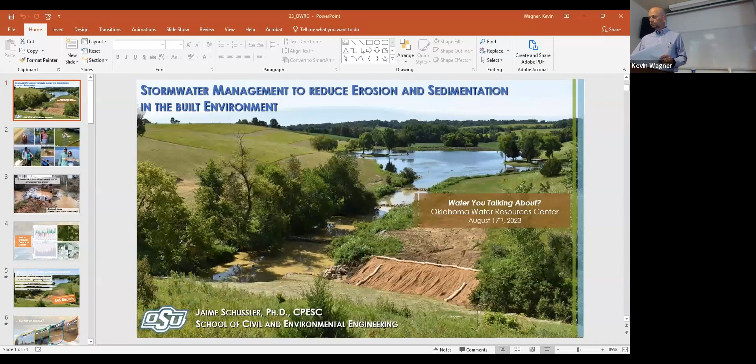Thank you so much, Kevin. Sorry. Gonna work. Just make sure. Perfect. Yeah. Thank you so much. All right. And I want to thank you all for being here and allowing me to be the guinea pig. I think going first is both a blessing and a curse. There's no expectations to follow up on, but I also hope that I'm getting you the information that you're anticipating today.

So I believe the title of my talk was Stormwater Management to Prevent Erosion in the Built Environment. I just had one correction that I added as I was going through these slides: it's to prevent erosion and sedimentation in the built environment. And so I just want to thank you all again for taking your lunch to listen to me talk about the things that I'm very passionate about.

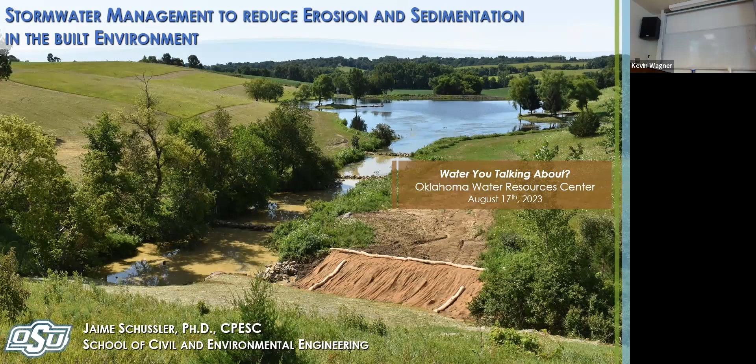Okay, so why do I care about our water resources? This is very important to me to relate to you, but this is more than just my work. This is my life. I'm very thankful my fiance actually came to support today, but you'll see him in some of these pictures, and we spend a lot of time around the water. We're big fisher people. We love to hike around the water. We just think everything is much better either on, in, or around the water.

And something else I really care about is keeping our waters healthy, because we have our golden retriever Max. He's a Pete's Pet Posse dog. You might see him around. But when he's not working, we can't keep him out of the water, whether it be the ponds on our property or creeks. So we want to make sure any water that he's getting in is healthy and not going to make him sick. And more so, I have some little nieces now, 3 and 3 months. They're also quite the water bugs. So when I'm thinking about the health of waterways in perpetuity, this matters even more to me now that I'm seeing the next generation.

I'm originally from Milton, West Virginia, or the lower Guyandotte watershed. One of the things that I task my students with when they start in my water classes is knowing what watershed you're from and what issues you're facing there, because in every watershed, there's very likely something that we could do better or improve. And so because I'm so passionate about these things, when I was thinking about a career, I decided to go into water resources engineering.

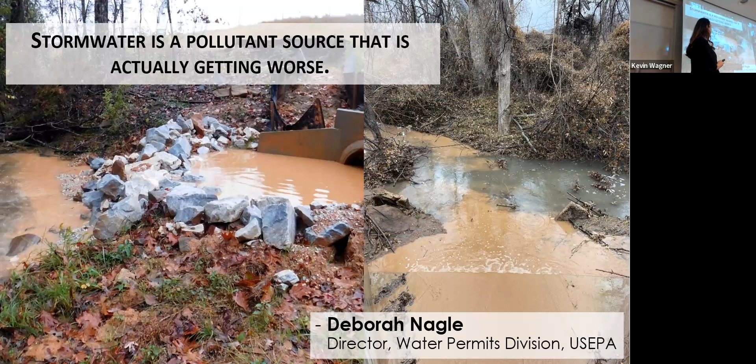Why is it getting worse? There's a lot of reasons. I'm sure you could give me a whole list, but the two that I focus in is the shifts in hydrology. Infrastructure, or ways that we were designing previously, are just not up to par with what we need them to be now that we're seeing shifts in such extreme events. We're having much more frequent and much more intense rain events. And how we've been designing just isn't going to cut it anymore.

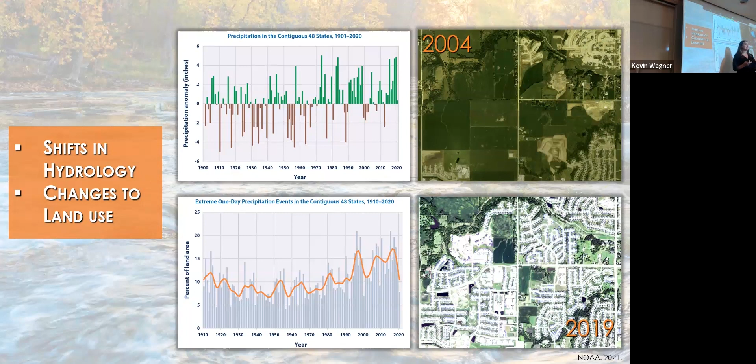The other big change that we're seeing is shift in land use. This was a watershed that I worked in Iowa during my master's. In 2004, you see a lot of open green space. Flash forward to 2019, just 15 years later, the exact same frame, you see so much more development popping up. So yes, post-development, we have all of these impervious areas that's going to increase our runoff. But how did we get there? And so that's what I'm going to focus on today, is some of this erosion and sediment control that we can do to prevent some of the downstream effects of the sediment-laden discharge.

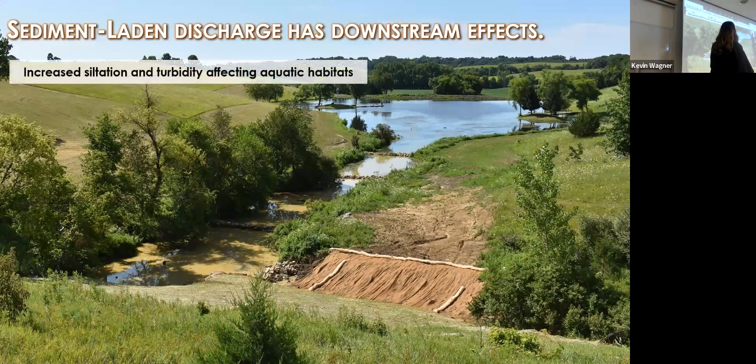What are some of those effects? Well, increased siltation and turbidity, that's going to affect our aquatic habitats all the way up. If all of our conveyance infrastructure fills up with sediment, we've reduced their flow capacity. So we can't be safely passing the same flows that it was designed for. And as I mentioned, increased rainfall, more impervious surfaces, higher runoff rates, higher flows. So we're already probably under-designed for the modern events that we're facing now. And so if we fill these up, we're in even worse condition.

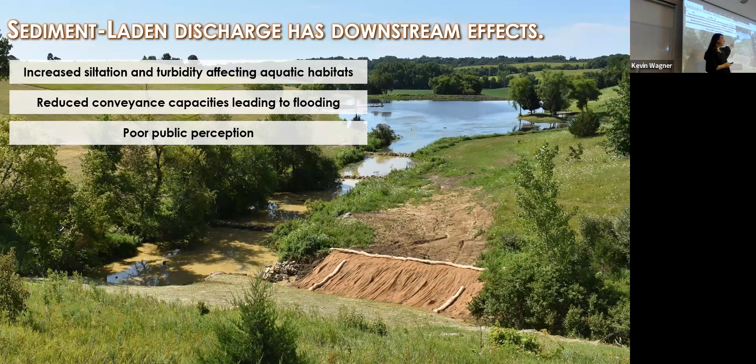Of course, poor public perception. This is my favorite photo to show of this. This is a private landowner pond right off of a construction site. We have a recreational pond, whether that's used for irrigation, for giving a drinking water source to livestock, recreation. We see a little dock out there. Well, a DOT comes in, they're constructing 2 new lanes of highway, 12 miles long. You can expect that there's a lot of exposed earth, and we see quite a bit of sediment-laden runoff coming into this pond. This pond had already been dredged out 3 times, and you see how many practices are put in place.

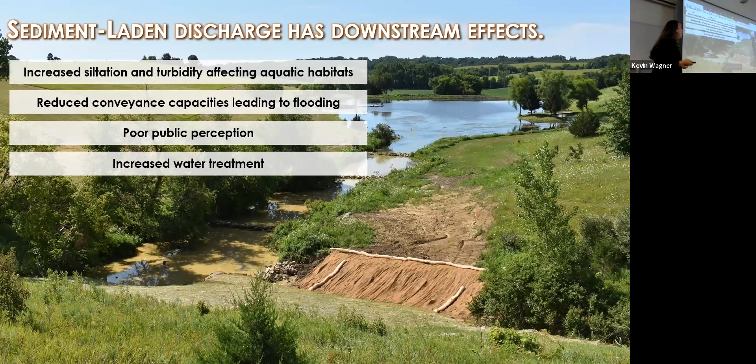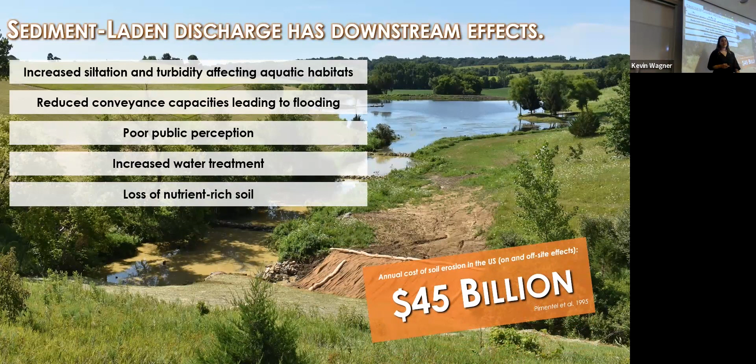Water treatment costs. If we're degrading our surface water quality, then we can expect we're going to pay for that on the back end. And then when we're talking erosion, I think a lot of people in here have an appreciation for nutrient-rich soil and good soils. And if we're just eroding that and washing that off, we can't keep up. The annual cost of soil erosion in the United States during construction, on and off-site costs, is $45 billion. So we're spending quite a bit of money on the effects of erosion and sedimentation.

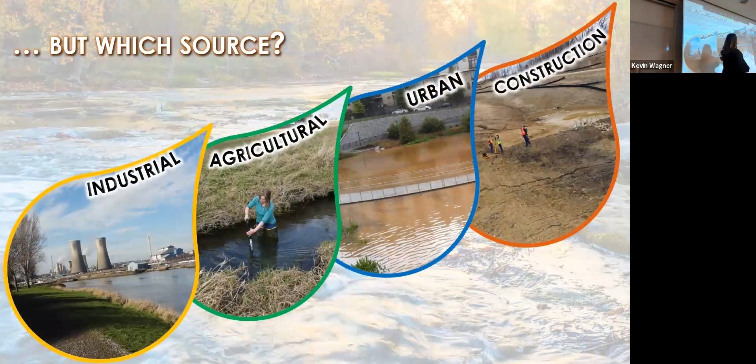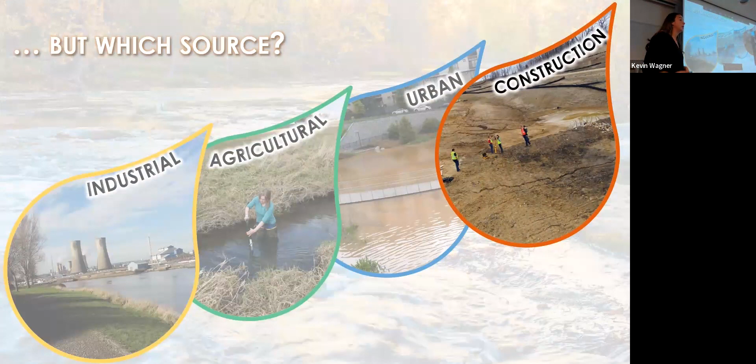Now, we talked a little bit about stormwater. Stormwater affects a lot of areas. We have industrial runoff, agricultural runoff, urban runoff, and construction runoff. The two that I focus primarily in are going to be these urban and construction areas. And today we're going to be talking primarily about construction, or that development period. So that period that we're getting to the built environment, or really altering those land use changes.

A lot of people will say, well, if this is such a problem, if it's so bad, what are we doing about it? There is some regulation in place under the Clean Water Act. We have the National Pollutant Discharge Elimination System. And then in construction, we have the Construction General Permit. Here in Oklahoma, we know this as the OKR 10.

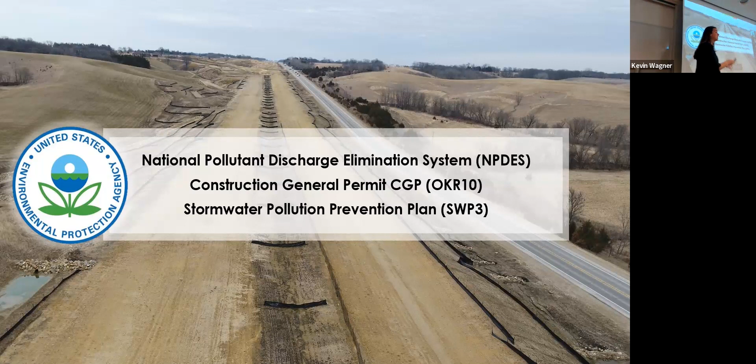This permit requires any construction that disturbs more than 1 acre to have a stormwater pollution prevention plan, or what we call a SWPPP. So this SWPPP includes erosion and sediment control practices, their design, the implementation, and the maintenance plan. This is a living document that is expected to be updated throughout construction. That way, if topography is changing, if land use is changing, we should be changing our practices or modifying our practices to make sure that we're treating those site conditions.

So I'm going to talk a little bit about the projects I've done and where my research group here at Oklahoma State is going. So we'll be doing a little bit of back and forth. Please stop me if you have questions. I'll also try to keep up with questions on the Zoom. If I don't get to them during talking, we will get to them at the end.

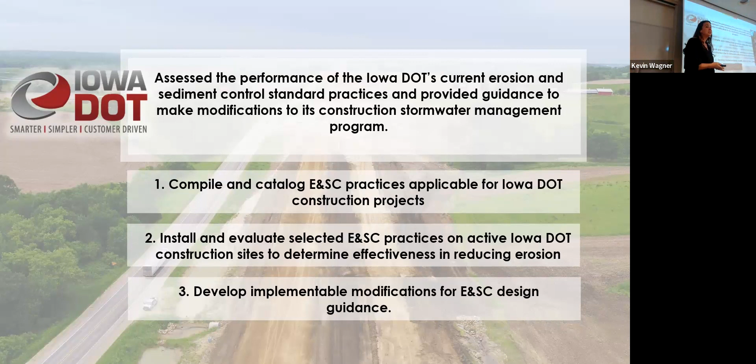Okay. So one of the projects I first started on in this area and learned the importance was when I worked with the Iowa DOT to do some field assessments of their current stormwater pollution prevention plan assessment. So we were looking at erosion and sediment control practices they were using, how effective they were, and what we could do to improve them.

So one of the first practices we looked at, I'm going to try to minimize this. One of the first practices we looked at were something called ditch checks or check dams. These are put within a channel or a conveyance to, one, try to slow flow velocities to reduce erosion within that channel and safely convey that stormwater. But they also have this effect where they create small impoundments within the channel. These impoundments are favorable for sedimentation, or that sediment to drop out.

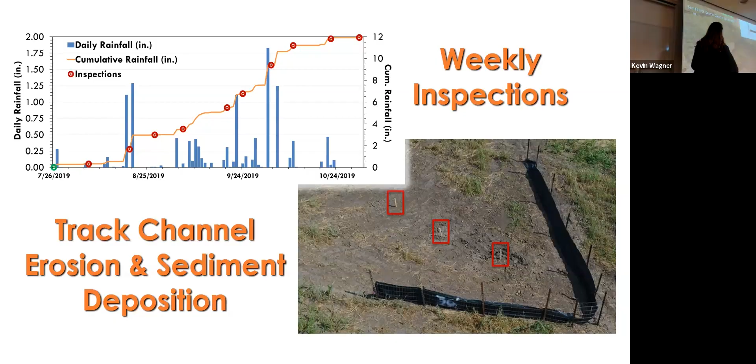So we had several different practices in the field. You can see some control points here that we had to survey erosion and sediment deposition. And we looked at those weekly and also rainfall on site. I heard several of you talking about runoff events, and I knew exactly how many runoff events there were on my master's project too. So the first one we looked at, which a lot of construction operators are using or know well, is this silt fence. So silt fence is a common ditch check, but also perimeter control that they put around the site to try to keep sediment on site.

Well, the standard installation just included these steel T-posts and this geotextile fabric that was attached with zip ties. When you put this in a conveyance channel, you have high flows and concentrated water. And you can see right here, it comes right to the middle or the lowest point in the channel. Well, over time, this hydrostatic pressure causes some deflection of this T-post. That soon leads to that geotextile being dislodged from the ground and the sediment washing out.

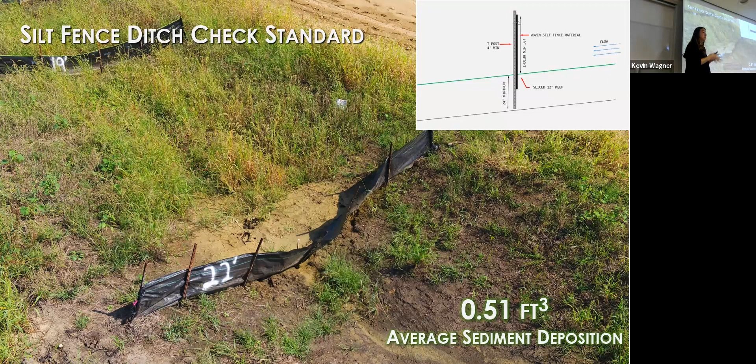So we monitored this practice over a construction season, and we had 3 in the field for triplicates. The average sediment deposition was about half of a cubic foot. So we looked into the literature and what other places were doing. That's the one big thing with erosion and sediment control. It's really not scientifically tested or based in their design. It's very much rule of thumb. And everybody does it a little bit differently.

So we looked, what could we do to improve this, to try to prevent some of these failure mechanisms from happening? And so we found this V-shaped ditch check, which was interesting because you have this vertex here. All the water is very concentrated right to this point, and we cut the fabric just a little bit lower. And there was a wire reinforcement on the back. Well, by cutting that fabric just a little bit lower, we created a weir. So we were controlling where the water was going, where it was dewatering from. And you can look just visually from the last picture to this one, the patterns of sediment deposition going much further back in the channel.

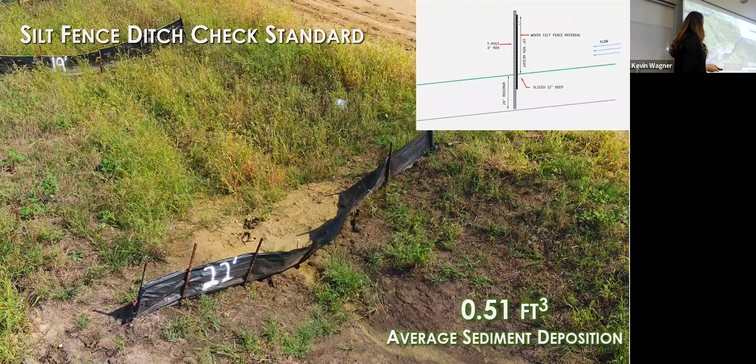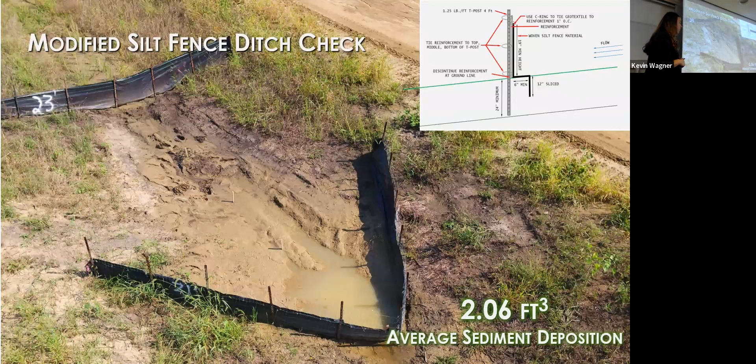Okay, so here's what we were seeing for deposition. And then we see a much wider deposition pattern happening. Well, after surveying, so we did some ground surveying and also some aerial inspections, we found that the average sediment deposition was about 2 cubic feet. So we increased the sediment capture behind each of these practices by about 4 times with just a few changes. Now there is an additional component with that wire reinforcement.

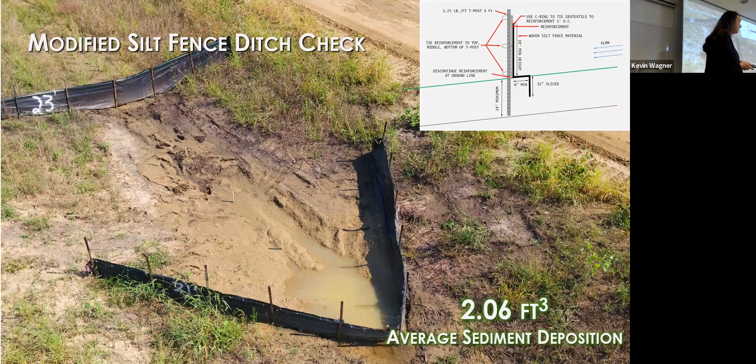So we're thinking here probably an increased cost. The DOT is concerned about that kind of thing, which we'll get to in just a minute. Now, another very common ditch check is what I call a wattle, some people call socks. But this is going to be a tubular device that has some sort of fill material. A lot of times it's a natural material, like a wood chip or a straw, and then encasement on the outside. So essentially a sausage.

And then we're staked through with wood stakes. Contractors love these because they're very easy to install. They're just rolled out and staked right through and they can move on. These get installed much faster than silt fence, so very favorable on the construction side of things.

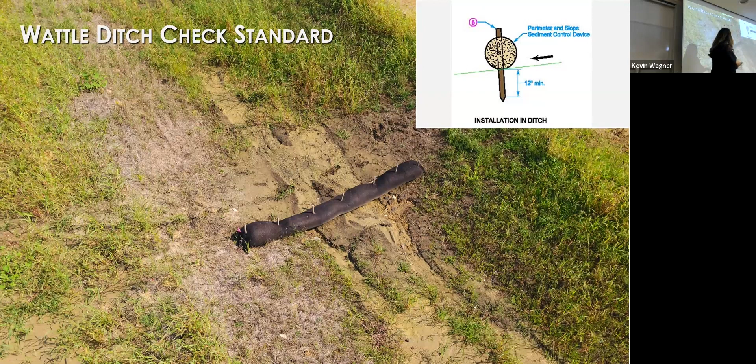Now, if we look here, this is the upstream side, we see some patterns even of erosion happening around this wattle. So maybe some deposition in the middle, but some patterns of erosion on the upstream, and we can really see those on the downstream side. So what's happening here? Well, depending on what that fill material is and how well staked it is, those wattles can become buoyant and flow can just bypass right under them. And that's what ended up happening. We're getting some undercutting occurring. And so about 0.1 cubic feet sediment deposition on this wattle.

Again, look to other places. What can we do better? Looking in the literature, what can we do better? And we see this non-destructive or teepee or A-frame staking. It's called a number of things in the field. But the stakes don't go through the wattle. They go on the outside. And with that A-frame, they're putting some pressure on the top of that wattle. So it's not able to float up quite as easily.

We also have this natural fiber underlay. And some, if you look up in the detail, some sod pins. So we're able to go through just the encasement through the underlay to help with some of that ground contact. And so that helps prevent some of that undercutting. And visually, you can see deposition happening. We had about 1.5 cubic feet of sediment caught behind this wattle installation. So again, additional components, but quite a big change in how much sediment we're capturing on site.

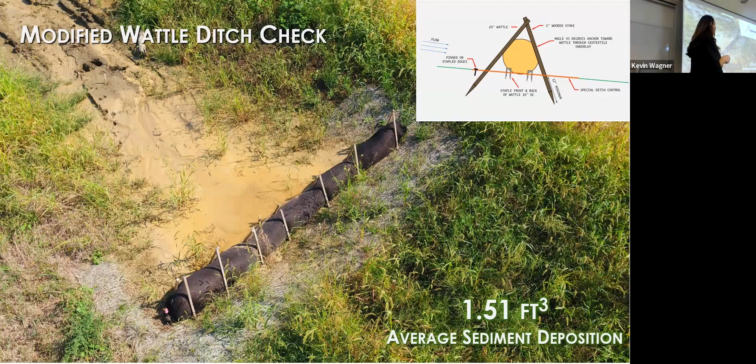Now, if you compare those, anything that wasn't caught in this standard wattle installation, we can assume that's just running off site. Well, the DOT wanted to know a lot. Of course, performance, we're trying to put some science to these practices. And then they're also going to be concerned about cost. But when we did the analysis, the DOT really liked what they were seeing. And my master's project influenced a change in specifications at the Iowa DOT. That's when I really got hooked on research. And that's what I tell my students. Your research can make a really big change.

So maybe for some people, this just looks like a different drawing up here. But just want to call you to, if this wattle installation replaced this one on the site that I was working on, there were 3,500 ditch checks installed on that single project. Okay, if we did the silt fence, change the silt fence from the standard to the modified, we would be capturing, it's hidden here, 18 truckloads of sediment with the modified, as opposed to 4.5 truckloads with the standard. So that's quite a big difference.

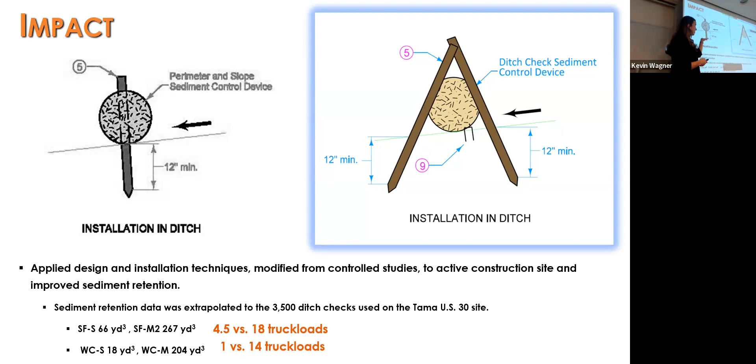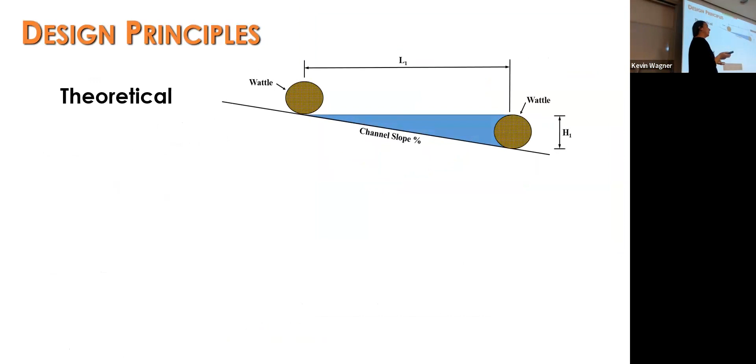I mean, if we don't make these changes and we know that we can do it better, we're just dumping truckloads of sediment into our surface waters. Same thing here with our wattles. If we don't make that change, we're dumping 13 truckloads of sediment into the surface waters. So these little changes can have quite a profound impact. Okay, now, what are the design principles behind installing a wattle or putting these in your plan?

Those deposited sediments. Mhm. What did they have on the soil property? Yes, so they were a sandy clay loam. That's my USDA that I have on the top of my head. What else would you like to know about them? Don't you think that will affect the soil? Absolutely, yeah, that's true. Depending on what soil you have on site, your performance is going to be affected by that. Here we had pretty fine soils on the site.

A lot of times with these ditch check practices, we're only going to be capturing those coarser grains because they can drop out of impoundments very quickly. Now, the one thing to consider about these impoundments is their maximum height is only going to be the height of that wattle. And so it's a shorter distance to fall out of suspension as well. So if we can catch some stuff in the channel, that's great. But you're right, it is going to be affected by soil properties.

So when we're talking about design principles with ditch checks, we consider the height of the practice or the height of the wattle, which was a great segue, thank you. And then the slope of the channel as well. And we can come up with our spacing accordingly.

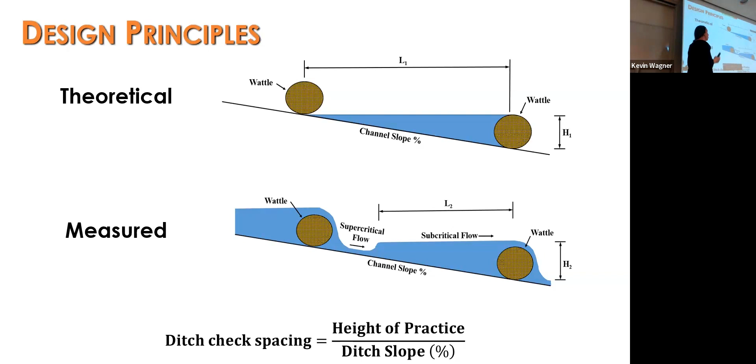Now, when we were in the field and looking at what was happening, even if it was specified in the design plans to be installed like this, they often were not spaced perfectly. So we had these areas of subcritical or less erosive flows and these areas of supercritical or very fast erosive flows. And so we wanted to look at how to help with the design and the implementation.

And so part of that project was to come up with a design tool to help implement some of these findings. And so just simply, with the channel geometry of the site and what practice was desired, it would output the ditch check spacing and then also the quantity that was needed, whether that was in linear feet, so going across the channel, and then how many were needed down the channel.

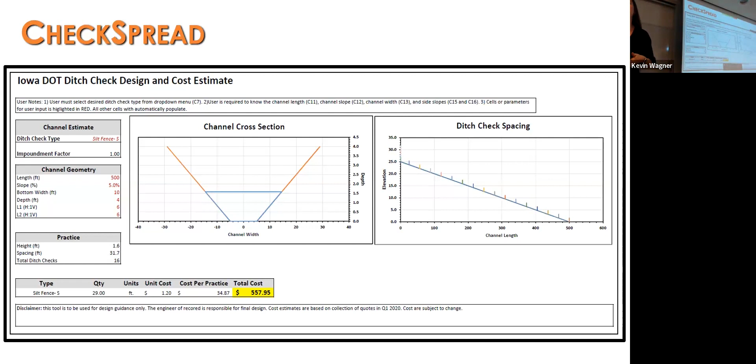We sent out for cost estimates from the common erosion and sediment control suppliers of the area. We have 5. And then we could also tell them, based on what practice they were using, about how much it would cost to properly design that channel using ditch checks. So up here, they could toggle between silt fence, wattles, or rock. And this has been picked up not only by the Iowa DOT, but several others. South Carolina also uses it.

So that's kind of where I was. And when I got here, I was thinking about, what do I still want to know? Or what do we need to know? Well, we took some of these practices and we're still putting a lot of synthetic materials out during construction. And as much as I would love to tell you that they get picked up, a lot of times it's just not the case. And so there's been a call to try to make changes to more wildlife or eco-friendly erosion and sediment control practices.

People love the silt fence. They really don't want to give up on it. But we do have some more natural alternatives. Now, the wattles I showed you were encased in a sock, but they also come encased in like a jute netting too. So there are some changes to be made, and we have to answer these calls.

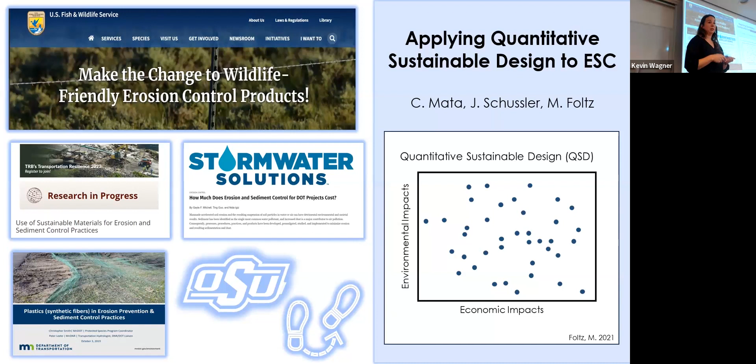So we are looking, I'm working with Dr. Mary Foltz, who's an environmental engineer, and one of my grad students, Cheyenne, on trying to come up with a quantitative sustainable design for erosion and sediment control. So this considers the cost, but also some of the environmental impacts.

So the first thing we did was to try to tackle that cost piece by sending out a Qualtrics survey to all 50 DOTs. The reason why we use DOTs is because they're the major construction facilitator in most states. On average, a DOT is going to have about 250 active construction stormwater permits in a single year. So we sent out a survey to them asking about various components of their stormwater management plans and inspections.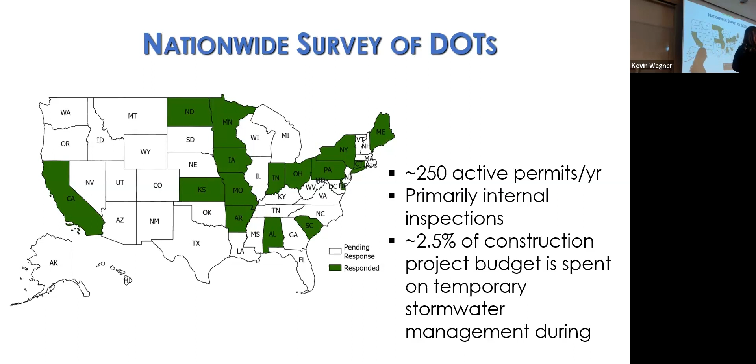We found out the DOT is primarily conducting their own inspections, so not a lot of accountability from the outside. And about 2.5% of the construction project budget is spent on temporary stormwater management or erosion and sediment control. So when we're thinking about common erosion and sediment control practices, we started mapping. We had these state answers, I believe it's 16 state answers so far.

And when we start looking at the results, we're finding that there's quite a wide variety in cost, but also implementation. Who is using what practices? There are some DOTs that have quite a big push towards some more natural practices and will spend the extra money on them. We can see wattles are more expensive than silt fence for DOTs to use. Maybe they're better for the environment. We're still trying to figure that out.

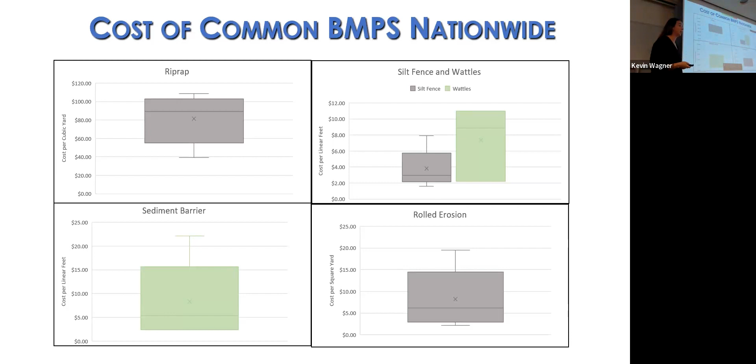States like Minnesota, some in the Pacific Northwest, they really have this push to get synthetic materials out of construction stormwater. So some people are willing to take on that cost, but we're finding there's just really not a strong trend just yet.

So I mentioned we're assessing costs and environmental impacts. Well, how are we doing that? We're using this program, SimaPro, that is a life cycle assessment tool that Dr. Foltz is well equipped in. And we are trying to get these erosion and sediment control components and how much of these components are being used on a project.

So we first went into the Oklahoma Department of Transportation specifications, came up with a catalog of what materials are being used, how much are needed, and then we set system boundaries. So we're using a standard drainage trapezoidal conveyance channel for perimeter control, looking at 100-foot span because we figure that's easiest to extrapolate from, and then about 1 acre for some of these erosion control practices.

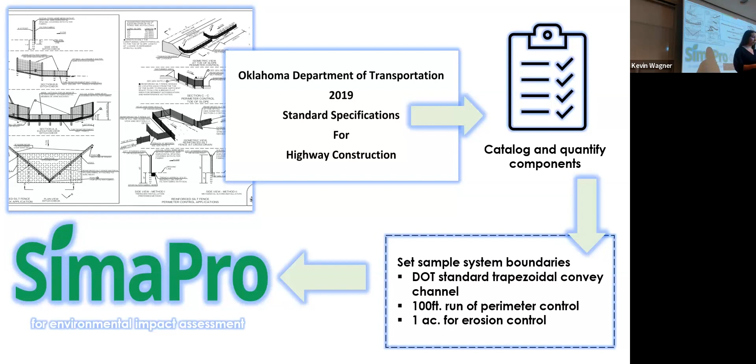We can plug in that quantity into SimaPro, and we'll get some of these impact categories like ozone depletion, global warming, eutrophication, etc. Now we're still in the very early phases of this project, but I just want to give you an example of all of the components we'll need to put in for a silt fence. We have geotextile, we have the stakes. Some places use steel, some places use wood. So there's some uncertainty that we'll have to do an uncertainty analysis there.

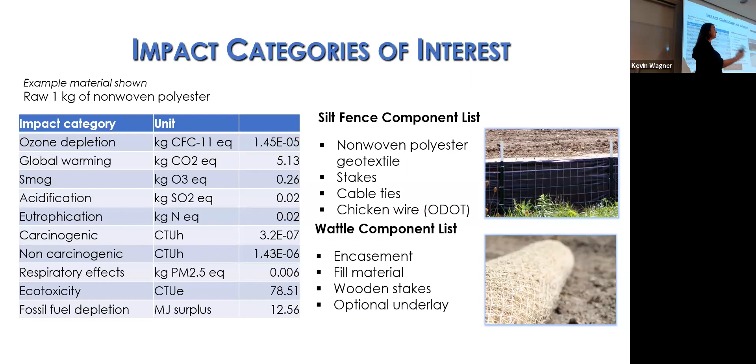Different types of cable ties, wire or plastic, chicken wire. Sometimes this is optional. Whereas if we go down to the wattle component list, we're going to have some sort of encasement or netting. There's a lot of different types of these. Same things with our fill material, our wooden stakes, and maybe we have an underlay. So we still need to put in all of these components and be able to look at them from an environmental perspective as well as a cost perspective, and hopefully can give the DOT, but also other large construction facilitators, this information so they can make informed decisions when they're selecting what types of practices they'll be using.

Now, another area I worked in was in-channel sediment basins. Sediment basins we know as temporary detention ponds. A lot of times these are extra excavations on a construction site that provide for more detention time and volume for construction stormwater pollutants to settle out. This was Iowa DOT's when I first started monitoring, and we can see there's quite a bit of problems with this sediment basin. We weren't trying to do any interventions, just see how some sediment basins were performing.

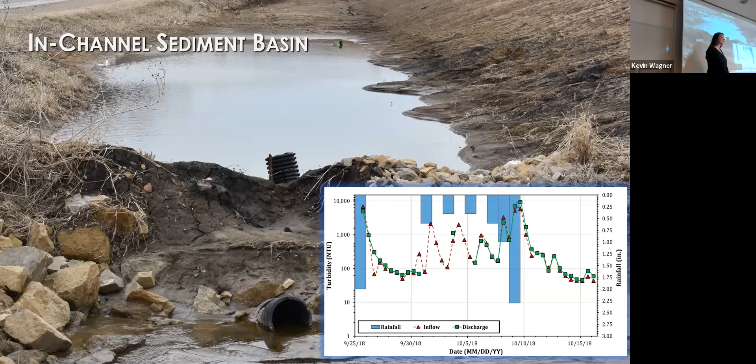On site, I monitored 3 overall, and they all looked about like this. We're looking at turbidity over time. And we have red being our influent, or what's flowing into the basin, green being our discharge. And what do you see on this graph? There's not a difference. Now, with each of these sediment basins, the contract price was $3,200 per installed basin. We're spending quite a bit of money on putting these basins in place for them to not work.

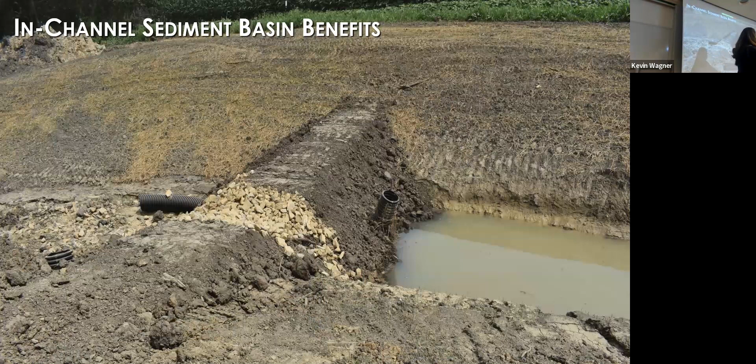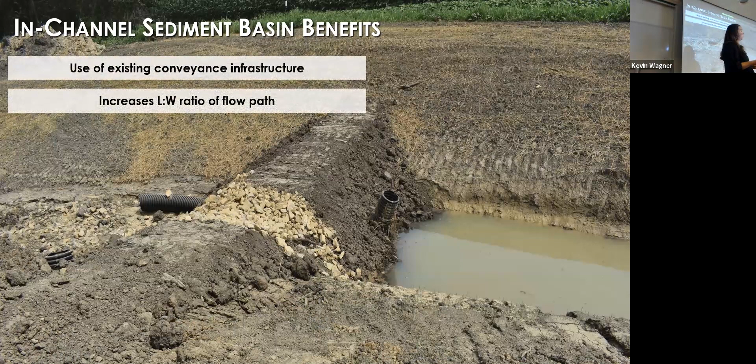When you put them in, they look like this. Looks a little bit prettier, but we still see a lot of exposed soil. So no stabilization, and with a high flow, this earthen berm is going to wash right out. So we started saying, well, are these in-channel designs even worth it? Well, we found some pros. It uses existing infrastructure. We see an increased length to width flow path, which in literature shows favorable for sedimentation. Reduced easement or right-of-way needed on a construction site.

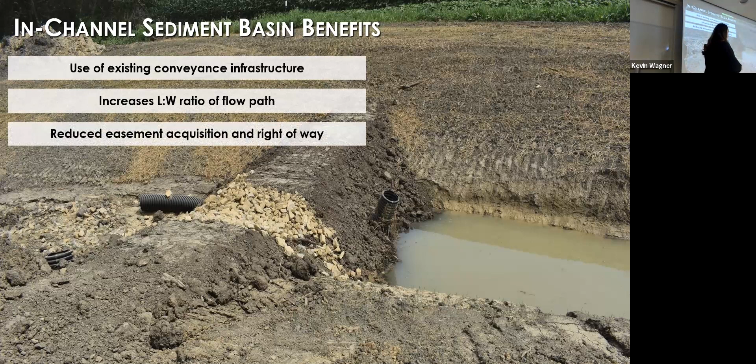If we're treating the stormwater within a conveyance channel, I want to point out, this is in a channel. This is not in a natural stream. In a conveyance channel on site, well, then we're not having to have that extra footprint for a really large sediment basin. So we said, how could we make this work? And looked at some components. Stabilizing that exposed soil, putting in a surface skimmer to dewater from the top of the water column, using flocculant, and putting in a forebay.

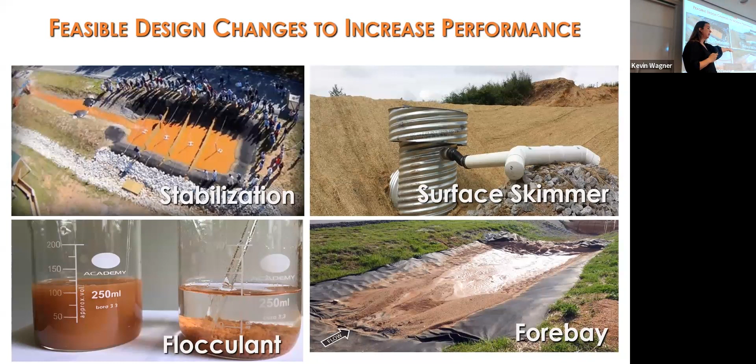And to Agu's point, we're putting in a forebay to capture those really rapidly settleable solids, those coarser particles like sand. That way, our larger volume only has to treat those silts and those clays. And we're not taking up the capacity with these really coarse particles. Okay, so we took this to a controlled setting and we tested what we call the most feasible and effective installation. Now, we looked at each of these components individually, looked at their performance, talked with the DOT, our project sponsor, and said, what do you think? What do you want to include?

They said, a surface skimmer seems easy enough. Putting down some geotextile lining or some other stabilization in that basin, that seems like a no-brainer. And putting in this forebay, it's just an extra rock check dam, essentially. And they had that material on site. So those were the three they went with. And then we wanted to test flocculant in construction stormwater. Flocculant's still relatively new. We only see about 30% or 35% of states allowing flocculant in construction stormwater management.

Now, flocculant is an agent that helps those really fine particles bind together so that they create larger flocs and settle from suspension more rapidly. In construction, the easiest way to do it is put down these blocks, these flocculant blocks that are essentially like big bars of soap.

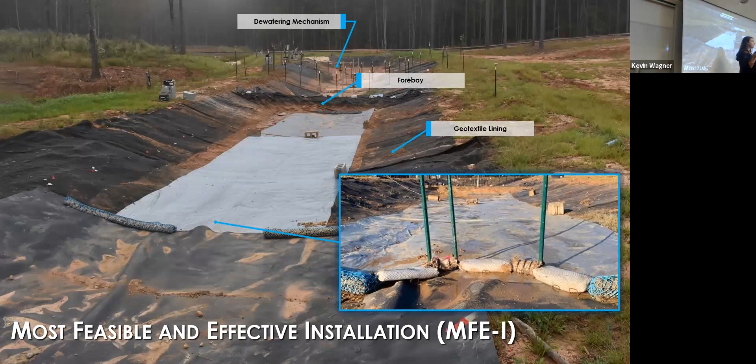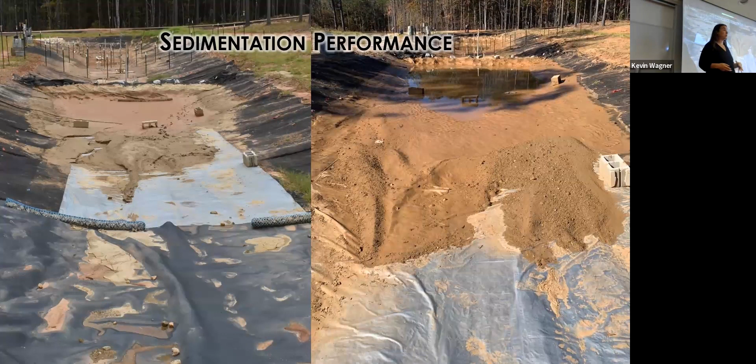So this is the sediment-laden water flowing over the flocculant blocks that would then go into the rest of the basin design. And I love to show you visually what's going on. We see on this side our most feasible and effective installation without flocculant. On this side was the same installation, but we had those flocculant blocks in place. So you can use these cinder blocks as reference points, but just visually we're having so much more deposition happening.

And when we look at this, with the MFE-I, we were able to capture about 96% of the sediment that was introduced to the basin. So pretty good. And with flocculant, we just got up to 98%. And some people will say, Jamie, well, is 2% worth it? And what I want to tell you is that even though this is represented by weight, that 2% is capturing those really fine clays that maybe we wouldn't capture otherwise. And so you have to think, are they really contributing to the weight as much?

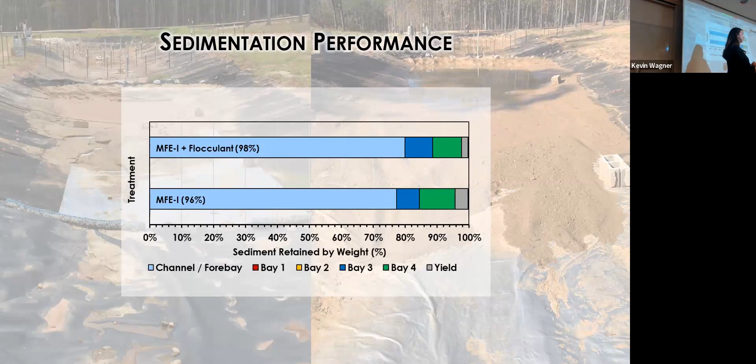Then what happened was that we would introduce filling again for another 30 minutes to simulate a second storm event coming through. Or if the basin was already at some capacity, how would that change performance? And we monitored over 48 hours to look at the dewatering behavior. Typically, we say a dewatering structure needs to allow for the volume to dewater in 48 to 72 hours. Well, with that flocculant, we were able to drop turbidity very quickly, even during the filling period.

Now, there's been talk in the past about putting turbidity limits on construction effluent. This is very scary because we have really high turbidity discharges right now. Well, flocculant could be one of those tools to help achieve, but there's a lot of question around if it should be used in surface waters.

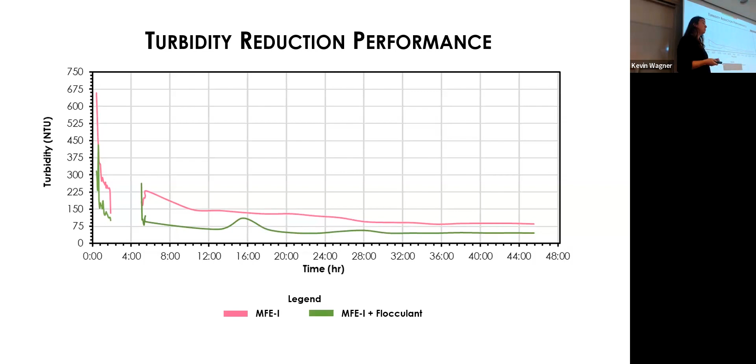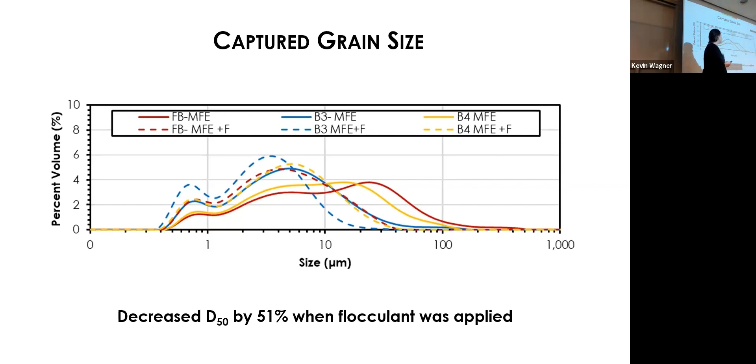The other thing flocculant did was help us capture smaller particles. It's like I told you with the weight, but this graph shows what's happening. We were able to take a sample of the sediment deposited in different areas of the basins. There were 3 different areas. These solid lines show the particle size that was captured without flocculant. The broken lines show with flocculant. This general shift toward the 0 axis is showing that we're capturing smaller particles. And so we decreased our D50 by about 50% when flocculant was used.

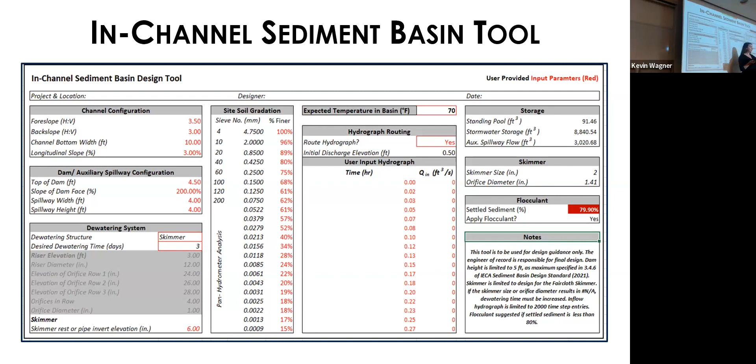It then gives the DOT what kind of storage they have on site, what size skimmer they should be using, and if less than 80% of the sediment settled, we recommend using flocculant. And so it tells you should you use flocculant or not. The flocculant is one of the things that I'm really excited about, and I think it could be a path forward in construction. However, there is a lot we need to know about flocculant and make sure that it's safe to be using and discharging, and at what concentrations we discharge.

So one of the projects I'm going to be looking at is the efficiency and longevity of flocculant blocks. That's what these are. Like I showed you, that's what we commonly use in construction. So one of the first questions being, well, flocculant is helping capture sediment. Is it helping capture other pollutants that could be sorbed to the sediment? And if we're increasing sedimentation rates, can we decrease the size of these ponds? So that could influence some policy changes there as well.

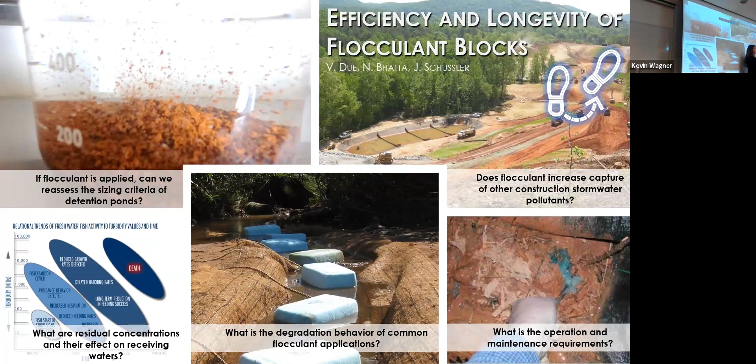What are the residual concentrations? So if we're dosing flocculant, how much of that dose is leaving the basin? If we're doing methods like blocks, what is the dosing? Is it even over time? Is it changing? What's the degradation? And then this, you can see, is a flocculant block covered up in sediment. So what is the maintenance required for these as well to remain efficient and safe?

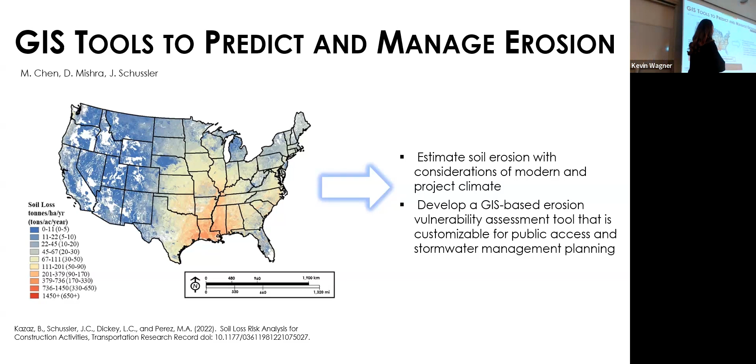Some other things that we're looking into, that I'm working with Dr. Deb Mishra, who's a geotech, and his student on, are tools to predict and manage erosion. When I was in grad school, I worked in GIS using some RUSLE applications in GIS, but that was just using what's available in RUSLE currently. So we want to see if we can use these tools to consider modern day precipitation and also projected climate precipitation, and hopefully develop a GIS-based tool to help with erosion assessment and also stormwater management planning.

So I gave you a little taste of where I've been, where I see us going. My main takeaways are that we need to challenge current design standards. Are they working? What can we do to make them work? And also consider the sustainability of some of these practices and be projecting forward on what issues we're going to face. Engage in knowledge exchange, determine what these problems are.

I wouldn't have known what these problems were unless I really started talking to the people that I was working with. So I think formats like this are great. I'm so excited to be involved and listen to what everyone has to say. And then finally, implementation. Being able to develop those technology-based tools on the research side so that this science can be implemented to inform planning and also resource allocation.